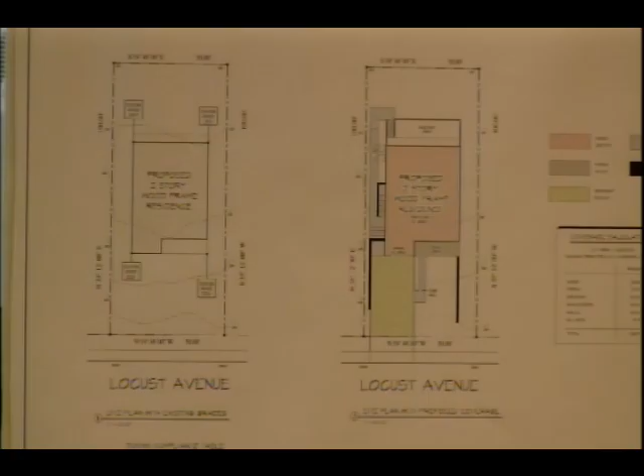The application was presented to the Architectural Review Board on January 16th, and it was approved with 2 recommendations. The first was to raise the band along the side to align with the upper porch. The second was to change the bracket at the garage doors to be a curved bracket. So we've done that on all the drawings.

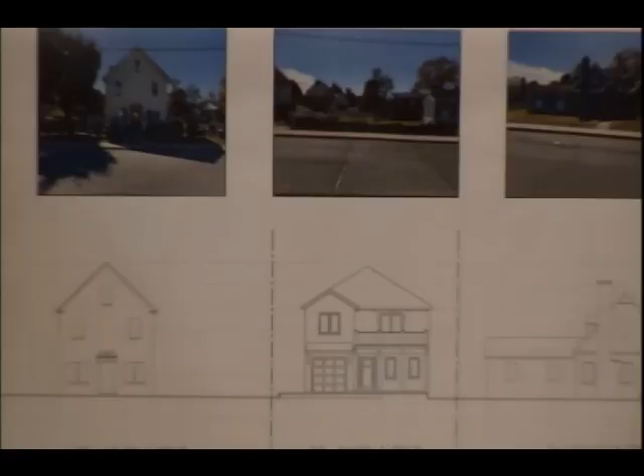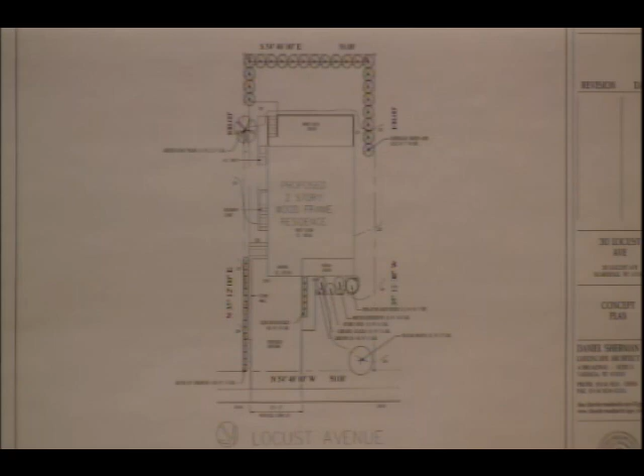We also submitted drainage plans that were done by Benny Salanitro, and we just received some comments from the town engineer this afternoon. Thank you for your time, and I'm happy to answer any questions.

Could you just elaborate on the comments about the stormwater? I literally just got them a couple minutes ago, I haven't even read them yet. Maybe Rick, if you want to go through them.

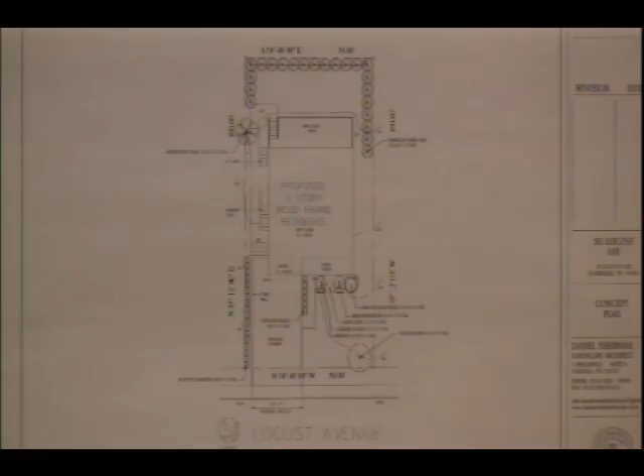Hold on, before you do that, tell me what exactly is there now. It's a vacant lot, completely vacant. So lots 30 and 32 are each 25 feet wide, and you're combining them into one.

They're actually two separate tax lots. Once the house is built, we're going to combine them to make one tax lot. It might happen automatically through an application to the assessor to reassign the number, and that will be a condition.

Does there have to be a new plat signed, or does it just happen automatically? No, it doesn't have to be a subdivision plat, they'll just do it on the tax map, so it automatically gets done.

I had seen that all the impervious surface you create is new impervious surface, since there's nothing there now. Nothing left over from anything. I think it was part of one of the lots closer to that other street, and it got subdivided at some point.

So I guess all the stormwater calculations prove they all make sense. They'll be reviewed, and we'll capture 100% of the new coverage, designed for whatever the town's requirement is, I think a 100-year storm for a new house.

Okay, great. Any comments? Once again, John, very beautiful, nice thing to see. Looks very beautiful. You want to put it up there so everyone can see, what good work you do, always looks good to see your work. Thank you, no, I don't have any comments, guys. No, looks really nice.

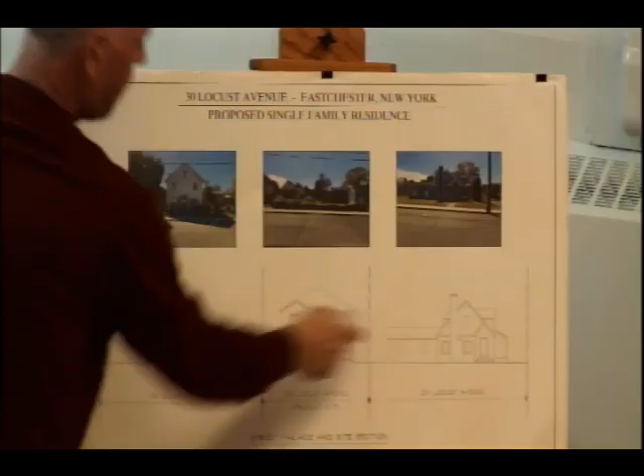Yeah, so this is his property here. So from what I understand, his drainage gets collected, goes into a pipe, the pipe runs across this vacant lot into the back corner. Supposedly there's a well there. We don't know if the well is working, or if it's just something that water dumps into, or how high the water is. We're gonna uncover that when the engineer's out there to do the deep test hole.

And we'll see if it fills, if it doesn't fill. If it doesn't fill, we're probably gonna use that as an overflow for our drainage. And we can work with the neighbor to try to take his water and also put it in there if that works. I don't know, the engineers are gonna have to look at that and decide.

Yeah, because the issue, the good news for your neighbor is you're going to be putting in Cultec and all types of water retention systems that will address the problem on your property. So you're not going to be getting overflow from his, but I understand the issue is that you have a pipe right now that stops.

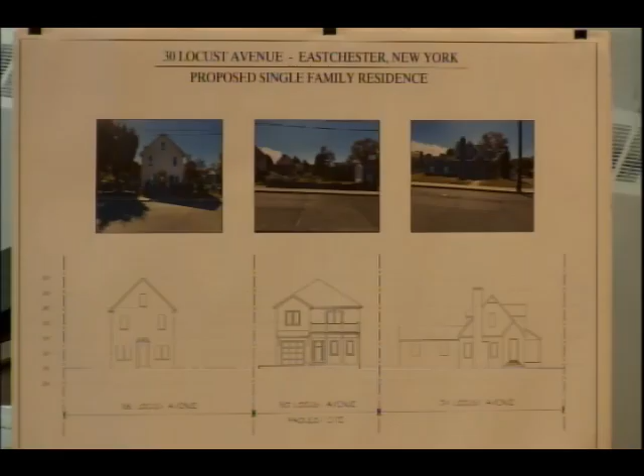It doesn't drain anywhere, because if he cuts me off, then I have no water flow. Then everything backs up, and it's already a high water table area to begin with.

And I think part of the question here as well, and I don't know what the answer is, but I believe this issue came up before. Sometimes by operation of law, you may have an easement for your water, and that's something you'd have to check, I don't know if that would be in the town records, or the safest thing would be to hire an attorney familiar with this type of thing.

Yeah, I'll let Mr. Tedisco speak. One of the questions that the board member raised was that your property drains onto another property.

No, my property drained on my original property before it was subdivided, which you guys approved. It was all one property. The drainage was installed when it was one property.

Oh, and you subdivided and sold off one. When I bought the house, I didn't realize that was an issue until we got all this rain and it flooded. We never would have been able to subdivide your property. We could only subdivide property that was owned by somebody else. We couldn't take your property and subdivide it.

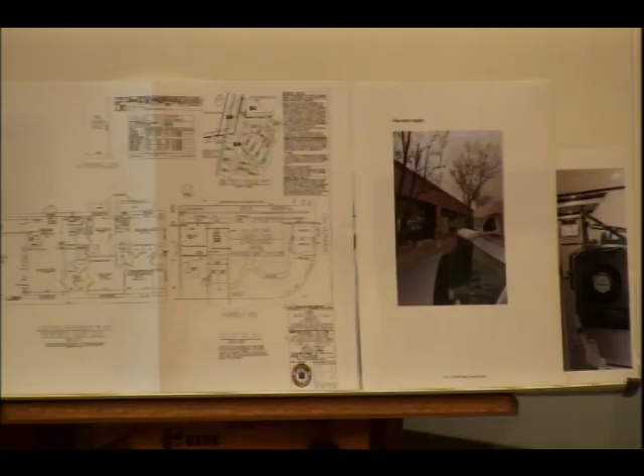Here's the plan, you could just hang it up — whoop, that's not it. Excuse me, I'll take it up. You know, I think this plan might be slightly revised to show parking compliant spaces, that is different than the larger plan, which is why I think he's putting up the smaller plan. Is that correct, John? No, let's just use this.

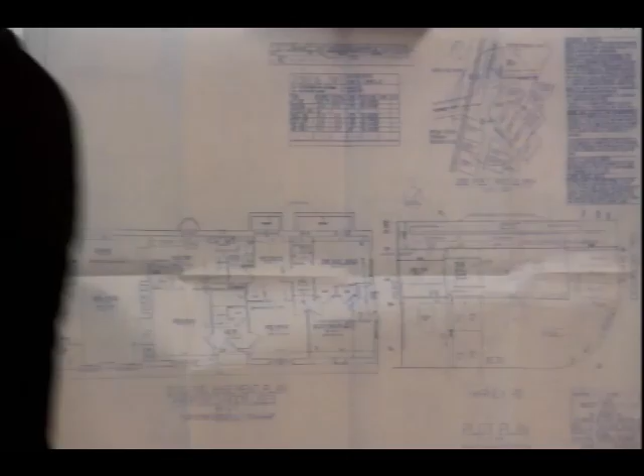This use of a daycare center is for pre-K. All the students will be young. The amount of employees depends on how many students we actually take in. We've proposed 2 employees, but it probably will be 3 or more. The ratio of employee to children changes with the age, so it's either 1 employee for 5 children or 1 employee for 9 children.

Part of his quest is to determine how many children he'll be permitted by New York State, because New York State provides the licensing for him. So he would hope to get 20, but is optimistic that he can get 15. With 15 children, he'll need at least 3 employees.

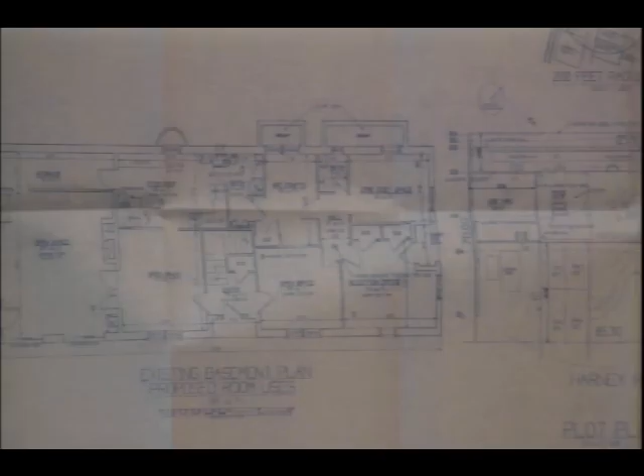We're required to have a space for every 500 square feet gross, so that's 4 spaces. We have only 4 available. We need 2 for the house because there's residents - there's 6 - and then we need 2 for deliveries and drop-off. Essentially, we can need as many as 8 spaces, so we're short. This is where we would require to be denied and sent to a variance board.

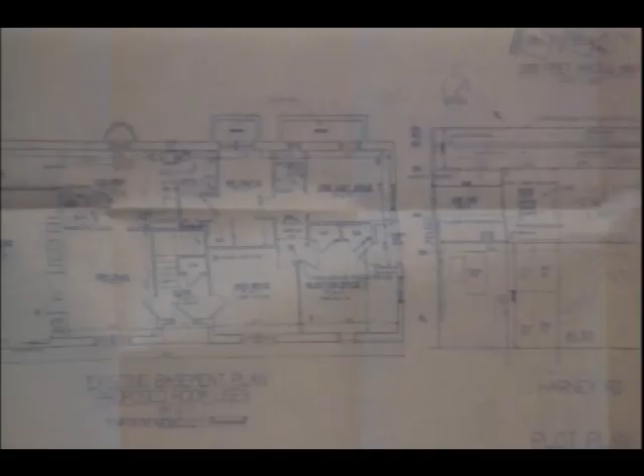To provide a little background, I've run across an old neighborhood study, not sure how old, it wasn't dated. It identified our area as Green Knolls, otherwise known as the Greenvale neighborhood, that comprises 106 acres, which is 4.9%, about 5% of all town properties. Of this Greenvale neighborhood, 69% of it is residential. It adds up to 7 units per acre, which is quite dense.

The parking and the traffic is certainly a concern we recognize. The area is a wonderful area for this use and many others because it has access to the Bronx River Parkway. So in terms of people dropping their children off and picking them up, they could drop them off and get right on the parkway to go to work. The drop-off and pickup times are probably the most contentious with the neighborhood, and we certainly realize that.

I would offer, and maybe Mr. Thomas would be better to speak on this, that parents aren't even allowed to come in when they drop them off. It's just up to the door, the kids are taken, and they get back in the car. It's a matter of seconds, a minute for each child that goes into the daycare.

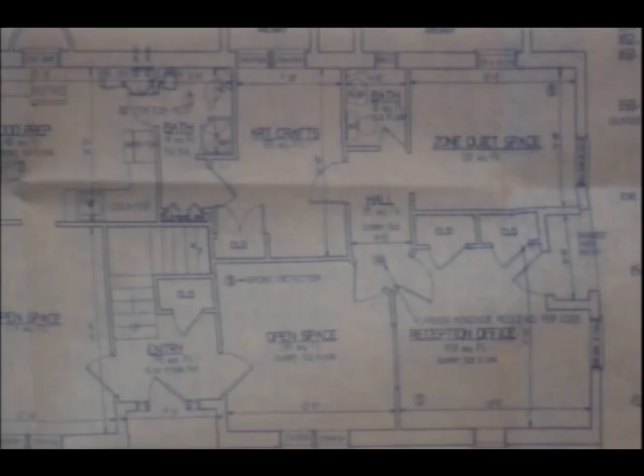These children don't go to other schools. They stay there all day, and then they're picked up in the afternoon. The property itself is a one-family raised ranch that was already altered for a doctor's office, and it has rooms, a little kitchenette, bathrooms, and everything you would need for its use. We have no proposal to change anything - we're not changing the way the exterior of the building looks. It has 2 tiers of outdoor areas for the children.

The state does require that a certain amount of outdoor area has to be provided. Can't lock the kids in all day - they have to have a chance to get some fresh air.

Mr. Thomas operates another daycare presently in New Rochelle for 20 years. His mother and another family member would aid in this operation. There's going to be 2 residents that'll be part of this and 2 other people that would commute, which is 1 car.

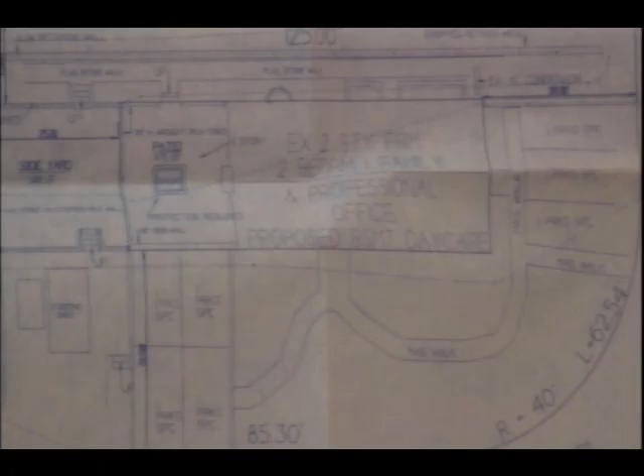In any event, we're going to need a variance for several cars. I don't know exactly right now, but I would ask for the most, and we'll entertain any limitations the variance board puts on us if they determine that we'd have to limit something to be able to get a variance. It doesn't seem possible to operate the business at the moment without that parking variance. So if you have any questions for me or Mr. Thomas, we'll be delighted to answer them.

Sure, there's a couple of things. The difference in this is you fixed the parking, so you got rid of the tandem spots and just showed the different parking - that's what this is, right? On that blueprint, the parking you drew out was not regulation, right? You had tandem parking, the parking spots weren't the correct size, so that's why you provided this, correct? That's why I do that, yeah. There's 4 spaces.

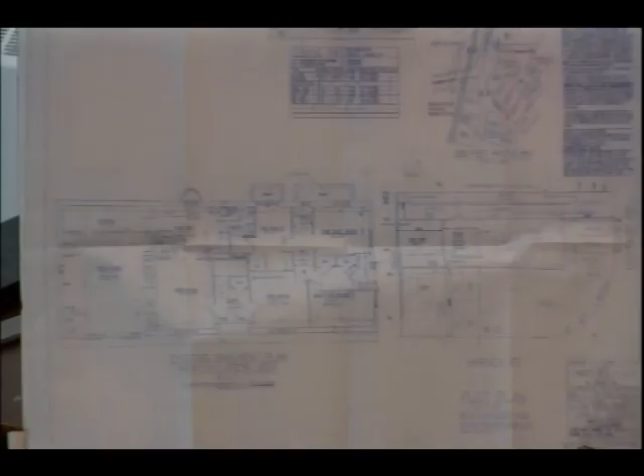Can you put this up there next to that so the viewing audience can understand what this is? You took the time to prepare it, so maybe we should show it to everyone. Maybe with a paper clip or a binder clip, just clip it to the side, just that one side. Yeah, that's perfect, so you could see the difference.

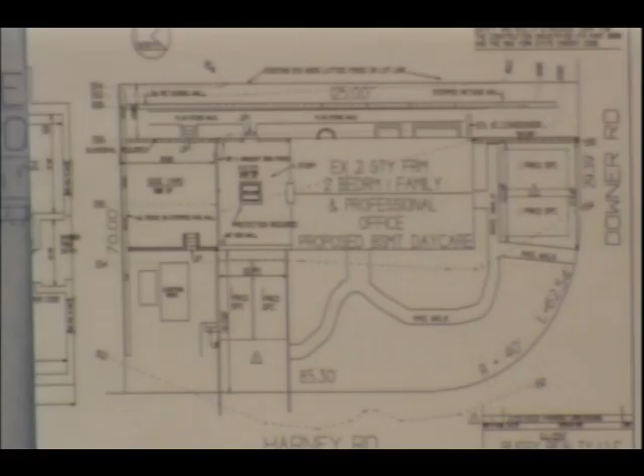Right, so you got rid of the tandem spots and you reduced the parking on Downer from 3 spots to 2 spots. Yes.

So before we go any further, you're here to get our motion to refer this to zoning for your variances. That's the first step, that's not a given. We have to agree. You're not here for us to say go talk to zoning. We're here to review the application and make sure we accept it, that we think it's reasonable, that we think it will actually work. So that's what we're here to talk about.

And right now I think we're all very apprehensive about that. Yeah, and it's not just about parking. We had an application on Brook Street, actually right at the bottom of Ray Place, for a similar type of operation. This was about 3 years ago, and notwithstanding the very best intentions of the applicant, the ability to move people in and out was, I think we had traffic studies done, incredibly problematic. I just throw that out there.

This is a different application, and every application is judged on its own merits. But I do know that particularly when you're dealing with very young children, it's sort of a double-edged sword. Someone's got to pick them up out of the car, you can't just let them run, particularly in a busy area. But that means stopping, and parking, and it's not like having a store with a certain number of spaces. This is something we care really greatly about, and there's always uncertainty that comes with little children.

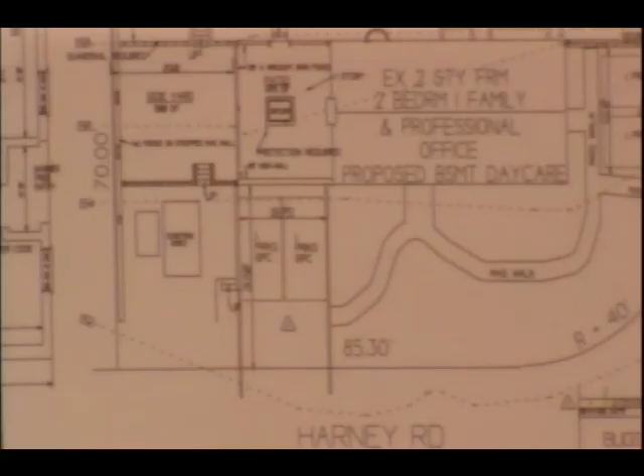So the major difference here is the 4 parking spots. Gary, can you zoom in on the revised one so we can see the 4 parking spots? So you can see the 4 parking spots there. In order to get the 2 on the upper right, you have to make a turn from Downer into it, take your child, walk them all the way over, get them there, then go back out onto Downer. Similarly with the other spot, and the other 2, same thing, you got to pull in and you have to back out. I mean, that's kind of objectionable.

Yeah, that's our concern, I think on Brook it was just easier. I don't know, and you got 15 children that have to be offloaded.

So that's 15 cars backing out. Or how long is the session? Hours of operation will probably be between 7 and 6.

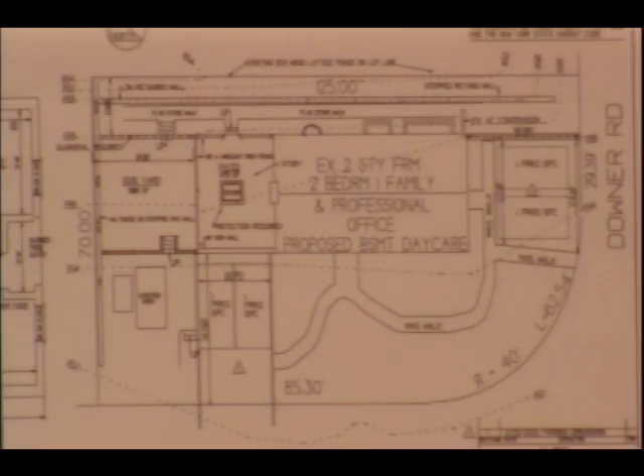Typically, and we do operate a daycare center today in New Rochelle of similar size, 188 Clove Road, right across the street from New Rochelle High School. Similar size, similar capacity, less parking than is available here today. We don't have issues with backing in and out of the driveway onto Clove Road, which, as you can imagine, is a rather busy street, being near the New Rochelle High School during school hours and letting out.

Here we do intend on prioritizing Downer, less traffic than Scarsdale, much less. But the drop-off hours are typically between 7 and 9. It's a pretty wide window based on parent schedules. Some are early, some are later.

Can I just add something? He wasn't done. Mr. Thomas, how many would be working there, you and your mother, sir, and other people? How many in total?

I wanted to add something that was said before about walking. There's 2 entrances, but there's an entrance right on Downer to get right into the building, so it's not a big walk.

So how many employees have to get there? And I'm presuming there's going to be one or more cars needed by employees. Two residents on site will be operating the daycare, so it's a one-car family—there's one car there. My mother and my sister will be commuting together, so that's two cars.

Okay. And certainly I think parking is one issue we have to discuss further. But the operations, as I said, the backing in and backing out—although it may work in New Rochelle—doesn't mean it works here. It's a separate situation.

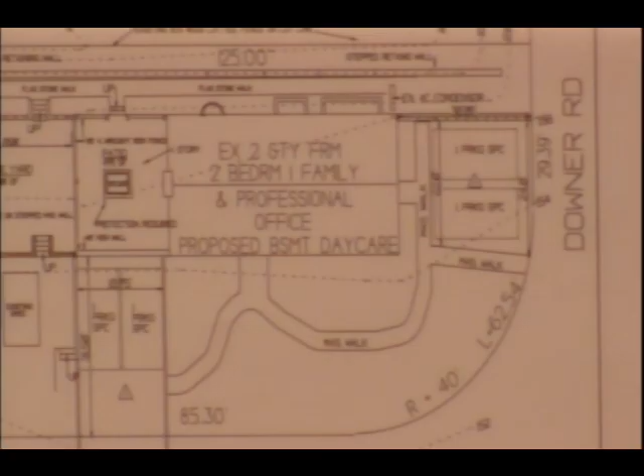But I think it's in your interest that we do so, because judging from the number of emails we got, you're probably going to hear a lot of people saying there's no way this is going to work, and your best bet might be to have a traffic consultant.

Well, who analyzes, and maybe on different issues, but the traffic issue—I kind of know what his consultant's going to come up with, and I kind of know what my consultant's going to come up with, and they're not going to be in agreement, right? I don't think we need to do the study. You're going to get a consultant that says it's perfectly okay, and our consultant's going to look and say it's not okay.

I'm more concerned with what the town's consultant says. Absolutely, I'm more concerned with what we say. I think in addition to a traffic consultant, our opinion on how this operates is important too, and we have to weigh in on it before we go to a consultant, as a board.

So that being said, all these folks are here to have comments, so take a seat.

Thank you. So I make a motion to open the public hearing on application 2513, Great Day Family Child Care, 32 Harney. Second. All in favor?

Aye. And maybe before we invite members of the public, we did receive several written comments. Any comments received before 4 p.m. yesterday are posted to the town's website. Just a high-level overview: the nature of those comments were related to traffic and parking in the area, a couple of questions about the outdoor play area, and a couple of questions related to the operational aspects of the business, which is really beyond our review and would fall more under the Department of Social Services review.

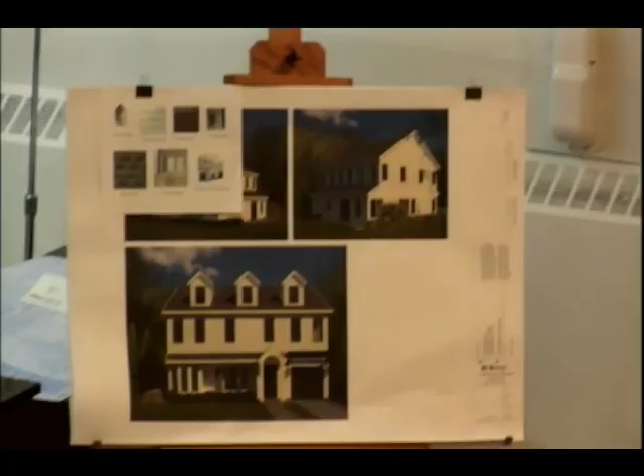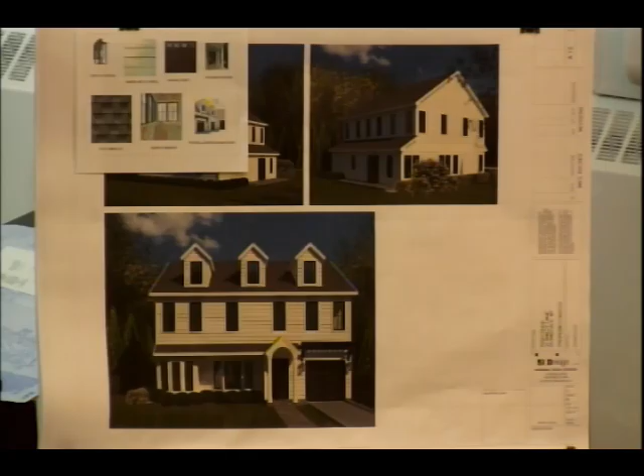We have been re-referred to the planning board because during the course of the construction or demolition, more demolition occurred than what was previously approved by the building department in terms of the percentage of walls and things like that. So that pretty much triggered the need to come back here. Although not a full knockdown of a house, it's pretty much 90% of a knockdown. So we were requested both by the town attorney and the town building department to come back to the planning board to get reapproval. Aesthetically, with the architectural review board and the planning board, nothing has changed. The design is exactly the same, the size is exactly the same. The zoning, if anything, has improved. The previous one had a 0.1 of a foot existing non-conforming condition that has been corrected.

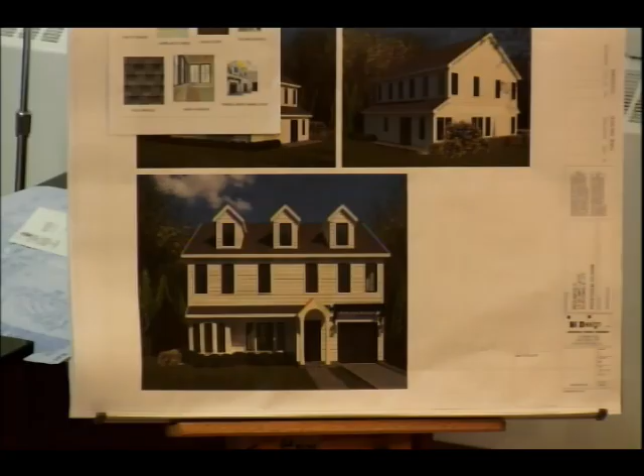So in essence, the original application consisted of taking off the partial second floor. Perimeter walls on the first floor were going to remain and be reworked, with interior alterations, and the end result would look like this. What physically really happened was pretty much everything came down to the first floor flooring, hence the need for the reapplication to the planning board.

The basement stayed exactly the same, the foundation stayed exactly the same, the footprint, the zoning, everything stayed the same. What we did do is classify this as a knockdown, so we redesigned the stormwater plan.

Although the impervious surfaces were all exactly the same, we acknowledge that previously we took credit for what was existing, and we only designed the stormwater plan for the additional impervious surface. We had our engineer test the soil, do the deep test, the percolation test, and redesign the stormwater plan, which has since been submitted quite a while ago to the building department. It netted an increase in the size and number of the Cultec units to conform with the Eastchester criteria, the 100-year storm.

The other thing that happened is this front portico was constructed 0.1 of a foot closer to the front property line than it should have been. So rather than pursue a zoning variance, the owner and builder are going to reconstruct it to meet the zoning criteria. In the end, every material, every light fixture, every garage door, every shape and size will be exactly the same as the original application, but we're here for a reapproval because of the procedures that took place. The logistics of the actual construction were different than what was laid out in the original application.

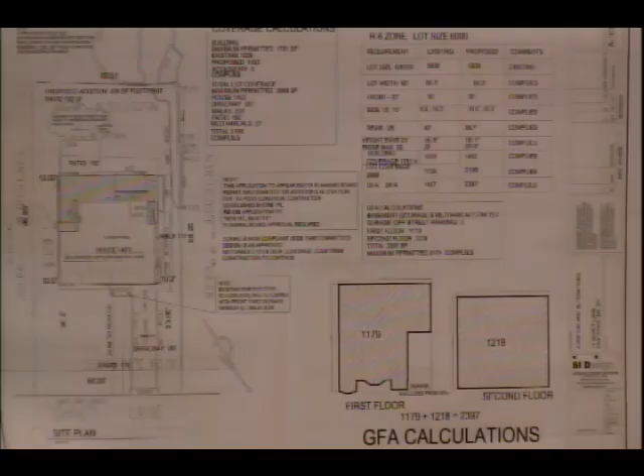So in essence, it is the same. The foundation remained; the new foundation was built exactly as per the plan. What changed is the wording on the application, the wording on the drawings, as well as the stormwater plan. Those are the three main things that changed. The setback used to be 9.9 because that was the existing condition, existing legal non-conforming. Since it was constructed new, it was built at 10 feet, so this changed for the better.

The stormwater plan in the rear - the drawings have been updated to show what was actually changed. Basically, the percentage of demolition has increased, and the stormwater plan has changed. Those are the main changes in the application. But the elevations from the street remain the same, correct, none of that has changed. I do have the photos if you want to put them up, if you'd like to see them. No, okay, thank you.

I do have something of a concern, because I went past and took photos of the site, and one thing I wasn't pleased with, looking back at the approved rendering, is that the windows on the second floor are evenly spaced underneath the dormers. As built, it's not that way—two of the smaller windows are closer together. They're noticeably asymmetrical.

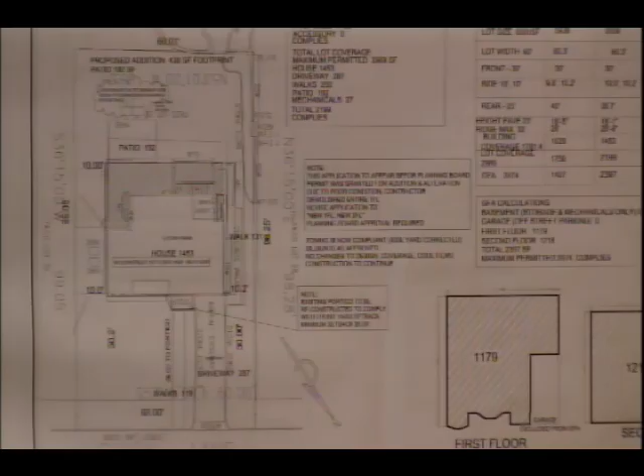Well, they were positioned—if you put it up, there were two on one side. Can you put up the illustration you used before? See, they were basically... it's not perfectly symmetrical, but there are groupings of two on either end, and two in the middle, and all the windows are the same size. It's not really a rhythm—everything's a little bit different.

They were basically dictated by the interior layout, and the architectural review board agreed that it was okay. We weren't going for perfect symmetry on this—it's not a colonial. It's imperfect.

I think the main difference is these two—they're probably a foot closer than what's represented here. And you have a smaller window above the portico. Yeah, it is noticeably smaller.

So, Mr. Nemisak, what are you saying? You took a picture of what's there, and it's not what we're looking at. I can put the picture up here—I have one too. Better to look at pictures than just talk about it.

Look, it's not perfect. I don't know that every design comes back perfect. I'm just saying it's something a little different, because you said it's basically been built as approved, and I could tell immediately—my wife recently finished her 10-year tenure on the Architectural Review Board, and she immediately saw that's not something she would have approved. So it's not a showstopper, not the end of the world, but either we try for reapproval or correct it physically to match what was previously approved.

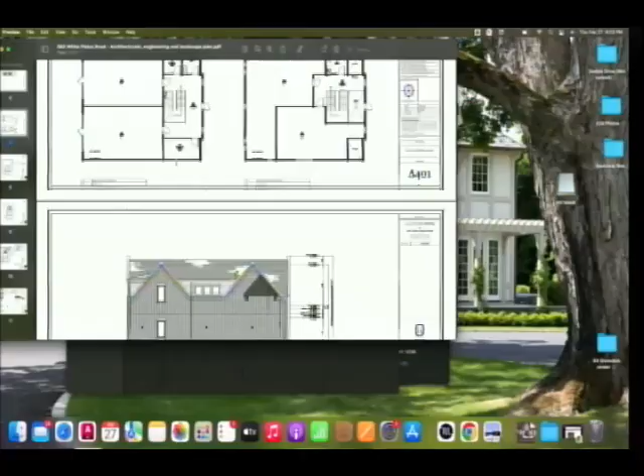Okay, so in terms of the signage, I have the drawings on the computer. Did you add them and then I missed them? Yes. Okay, no problem, it's been a while. It's not going? Let me try again. Oh, here it is.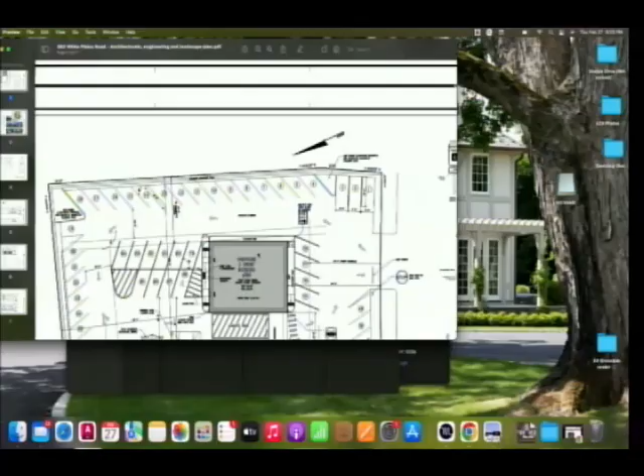So the signage, we have the directional arrows, which are in the parking lot. And then on the entrance, on the south entrance on White Plains Road, we have two entry-only signs, which will be installed perpendicular to the flow of traffic for ease of view. And then on the south curb cut, we have a do not enter sign, same configuration, perpendicular to the road. And then a stop sign on Cypress. Internally, there's also directional signage on the building, which will direct the flow of traffic as well.

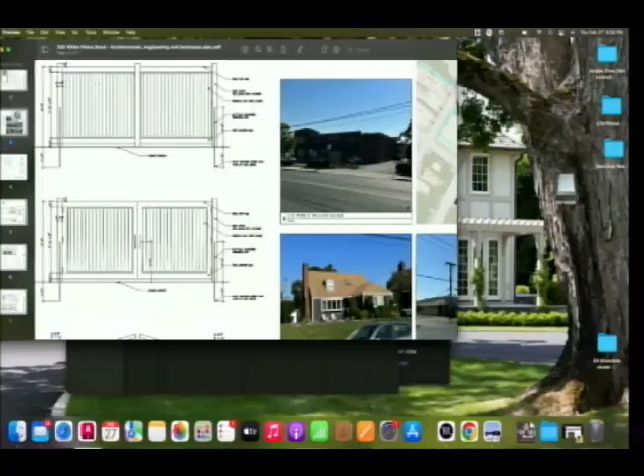In terms of drainage, I believe at our last hearing all of the comments were addressed. Yeah, there's an existing system, but I think you need to be in construction to unveil it and look at it and then figure out what needs to be done. Yes, that is correct. And at that time, I think Joe, who was here previously, said he would come out and do the inspection with our civil engineer. Right, and then we'll make any modifications.

Right, so for the board, the way we would propose to address stormwater here is as a condition of the approval: at the time, during construction, the applicant will consult with the town engineer to figure out what needs to be done, and no certificate of occupancy can be issued until the drainage work is done to the town engineer's satisfaction. Okay, sure. Follow that language, I can remember that.

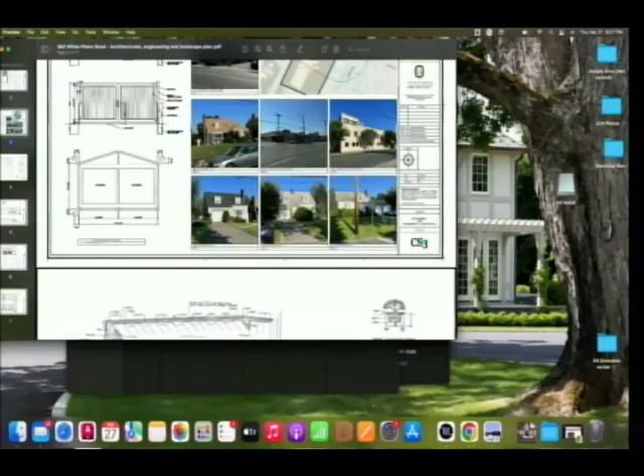Do you still have questions? Nope, those are my only two points. I'm just going through the conditions. There's some comment here also about the remaining comments raised by the town engineer in the memorandum dated the 27th. Nope, that one we can dispense with because the only remaining issue is number 3 on drainage. The others have been addressed on the plans, number 1 I just missed it, so we can take that one out as well.

That's good, so I don't have any questions. Is this an open public hearing? Yes. Any comments from the public regarding this application?

360 White Plains Road? No. So I make a motion to close the public hearing on application 2327, 360 White Plains Road. Second. All in favor? Aye.

Okay, so the conditions are the one way, you got that. During construction, the applicant shall consult with the town engineer to review the existing stormwater management system and modifications that are required. No CO will be issued until all modifications to the stormwater management system required by the town engineer are completed. And I'll read the last one just for fun.

This approval authorizes the applicant to undertake only activities specifically depicted on the plans submitted for review at this meeting, in accordance with the resolution approval. Any change or modifications to such plans require amended site plan approval. But you probably already knew that.

Good, so then, that being said, I make a motion to approve this application, 2327, 360 White Plains Road, subject to those conditions. Second. All in favor? Aye. Great.

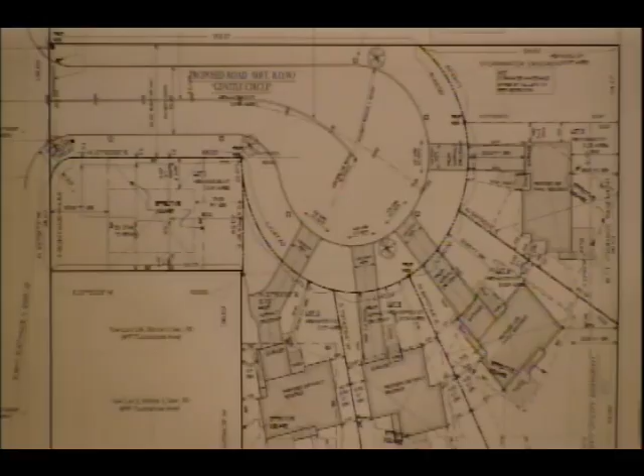So one variance is the town requires 150 feet from the center line of the new road to the closest adjacent. We're going to need a 6.05-foot variance, as where White Plains Road and our proposed road is, that is all we have. If we try to shift it, it'll create more issues.

Another variance is we're supposed to have a 12.5-foot radius, a 12-foot radius here. Again, we don't own this property, so we're going to need that variance. Right now, lot 1, we're not proposing to do anything - we have a future vision for this whole lot, so this is going to require variances to keep the house until we finally decide what we plan to do with this lot. So those are the variances I believe we need.

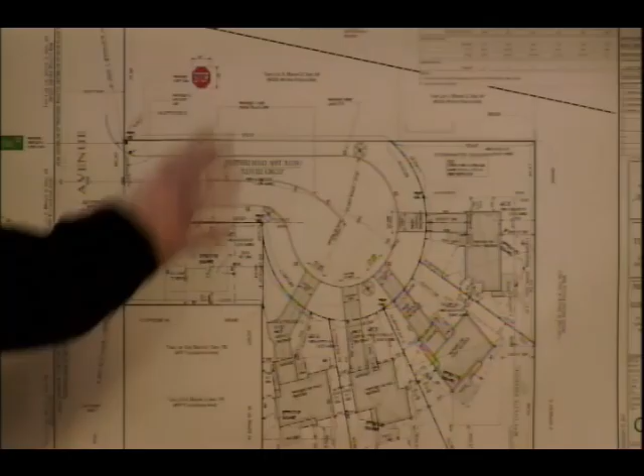But the actual homes that are contemplated to be built, do they all require no variances? No - all those lots, even this lot, everything: lot width, lot effective square, lot area, all that, every lot meets all the codes. The only lot that doesn't meet any codes is this area which we changed.

Instead of it having a separate lot, we made it as an easement in order to get rid of that whole other weird lot that we originally thought to have the stormwater on. Very good - a discussion of easements, that's how we began the day.

Discussion of easements. We have received comments from your consulting engineers. I believe some of it is a little clarification, but I think all in all it's pretty much there. We would like to at least get in front of the zoning board before we go any further with additional drawings and stuff. So one thing in all the reading I did before this meeting, it came up - it was the sidewalk.

Was that discussed, to put a sidewalk out to 22? There were a bunch of discussions, but I don't believe we got any resolution on that. Is that an option? How would you go about doing that?

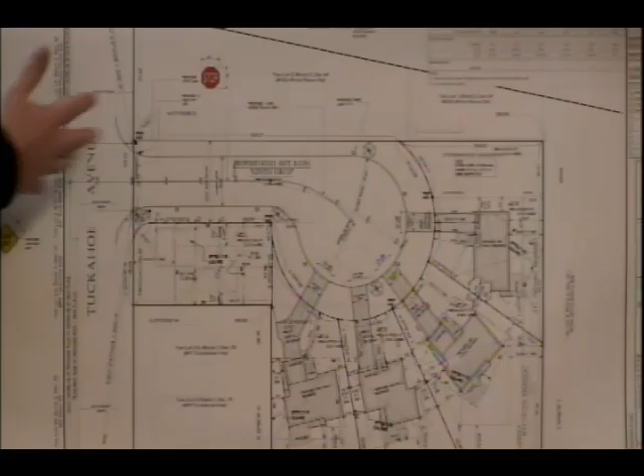Well, since there's a curb cut here, and a curb cut for the pizzeria here, I don't think it'll be practical to bring something out to this corner. It's just going to be a small stretch. Is there a sidewalk around 22? There's a sidewalk on 22, but nothing here.

That's when you'd have to put it on their property if you want to build a sidewalk. Well, we'd have to come across their property here and put two handicap ramps. And really, anybody coming down the road, there are no other sidewalks on Tuckahoe Avenue, so they're going to come here. I doubt they're going to come up onto the sidewalk when you're already 90% of the way down.

No, I agree, I guess it's not a good idea to put a sidewalk, because for you to do it, you'd have to put it in their parking lot. Unless it would fit in the right of way, because you own the right of way for that, because the town would own the right of way, so we could come to an agreement. Right, we could do it in the right of way, but it's just this short stretch.

I think it'll also kind of look weird, just this little piece being sidewalk and the rest of Tuckahoe being a nice small community. Yep, you're right. Okay, what are we doing here?

One other thing, we have had some communication with the fire department, and the applicant submitted the fire truck turning radius diagrams. The fire department is a little bit concerned that it's tight to make the turn into the subdivision road, particularly if a car is parked on Tuckahoe Avenue, and with parking on the subdivision road, that might be something we should continue to explore as we move through the application.

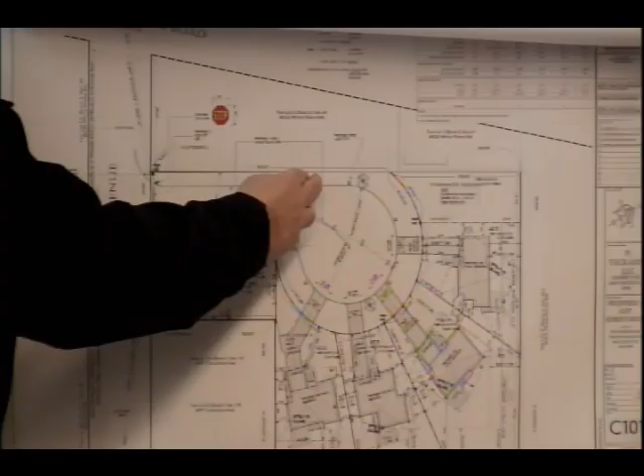So where exactly is the fire department concerned about if a car is parked? When they try to sweep in on this side, with the largest vehicle that they have. The other two apparatuses make the turn well enough, everything worked. The largest one, as it came in, there was a little bit of congestion here, and then as you came around, this light pole and this tree are going to be relocated, so when the truck comes around, it doesn't hit into it.

And there was a concern particularly with cars parked on Tuckahoe Avenue with the truck turning in, whether it would be able to make that turn. I remember a few times during public hearings as well, there were concerns from neighbors about parking there, and I think everybody was in agreement.

Can you stop somebody from just parking there? No, that would be something the police department would have to police, but you'd also have to look at creating signs saying no parking. Yeah, we can add signs to say no parking.

Well, on Tuckahoe, that would take an action of the town board. To prohibit parking on Tuckahoe Avenue would take an action of the town board. Yeah, it's not something we usually address. But I can add a couple of signs on the drawing to show no parking.

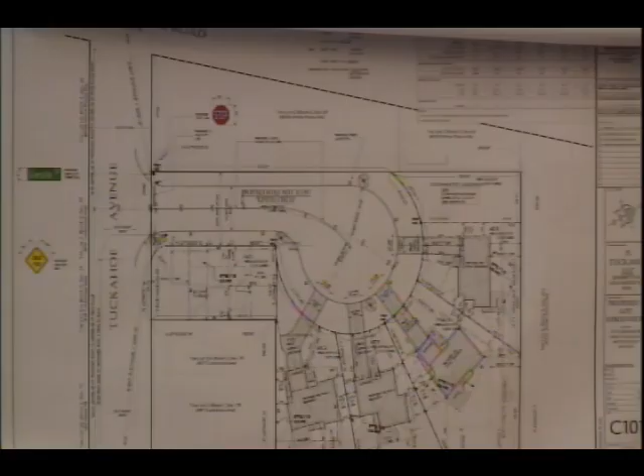I think it's probably worth some further review and discussion with the fire department. That's fine. I don't have any other questions, you guys? Nope.

This is still an open public hearing? Yeah, the issue with the fire department can be analyzed concurrently with the zoning board. Sure, if you feel comfortable making a SEQRA determination, the turning radius for the fire trucks goes to our subdivision standards and access, so that's something we can continue to work on. That's an issue that might come up for both variances before the zoning board, so it might be something we work out even before that board sees this application.

So this is an open public hearing, so if there are any members of the public that would like to comment, now's the time.

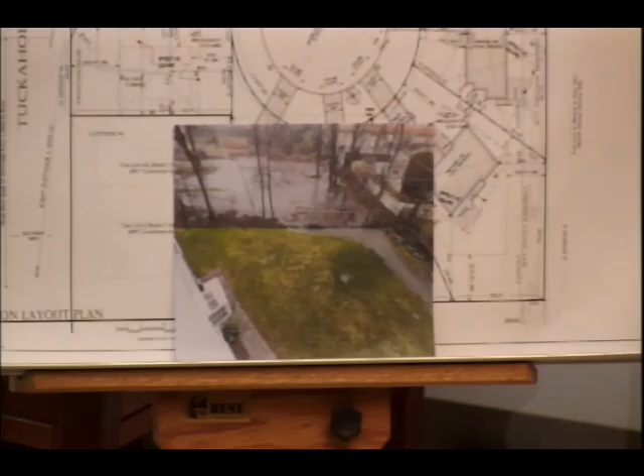This is a water issue. I don't know if you can get that. My name is Jean Gessoff, and I live at 5 Duluth Place. The picture that I just put up there is the water that collects on this part of the property that they're going to develop. First of all, I'd just like to say it makes me very sad when these nature preserves are developed and all of the wildness that there is in Eastchester is gone. That makes me very sad. But having said that, we have the neighbors and mine. I don't live on Tuckahoe, I live on Duluth Place, which is a cul-de-sac, and my property backs up to where it's going to be developed.

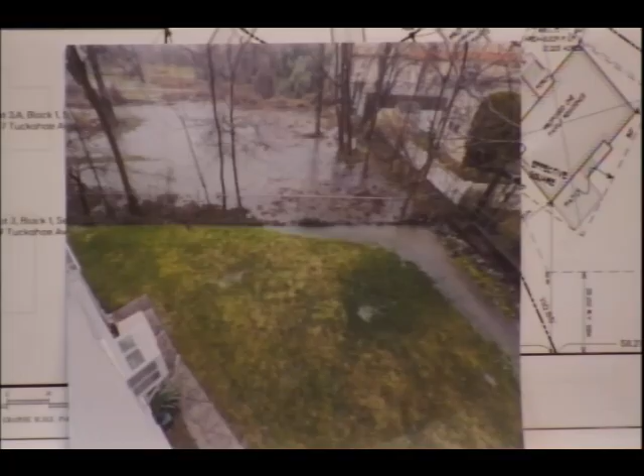We've always been concerned about the water that collects there. I've been in touch with the town, and they've come out and looked for drains. I was here about two years ago, and we talked about whether there were drains there, and it turns out there are drains, and they were not clogged like I thought, but apparently they're not big enough. So from what I understood, from what I looked at, you're going to put in bigger drains, and they're going to come out onto Howard. How are you going to get to Howard? Because my property and my neighbor's property, you have to come through there in order to reach Howard, which is a dead end. And nobody's contacted me or my neighbors about how you're going to bring these drain pipes through our property. Or will they be on our property? I don't know, and that's my question.

Could you get up and get to the mic? You're saying some important things. Can you speak into the microphone? I think all the sound goes through the microphone, and the court reporter can't hear it otherwise. What you're saying should be on the record directly, so maybe you could repeat it. You can hand the mic back and forth to each other if you need to, but we want to make sure to get it all.

What we can do is exchange numbers, and I can come out and we can walk through everything and discuss everything. I think whenever it's time for that, right? If you could write down your information, here's my card, I will call you tomorrow morning.

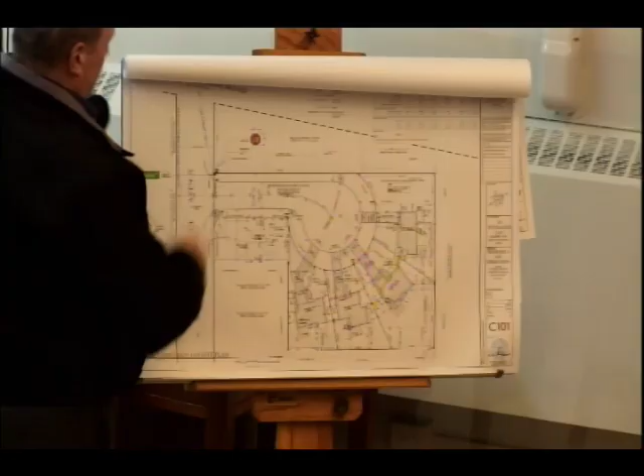So let's try and answer the question. So just for my knowledge, any water coming off the site gets held on site in the detention tank, and then it gets released, correct? Correct. So the way the system works, let's go back to the plan, because this has more information.

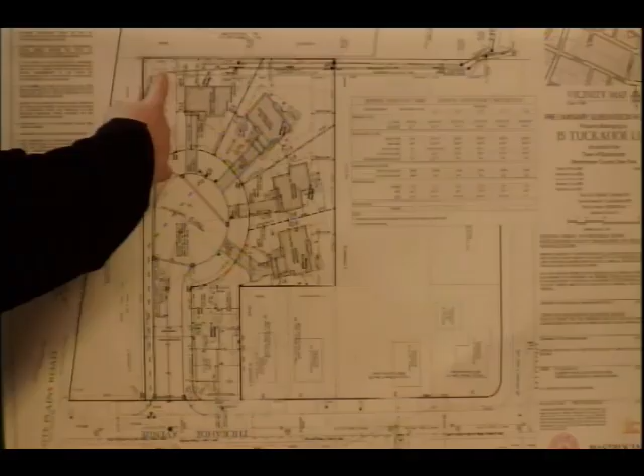The stormwater for the road is all collected in this series of catch basins and piped into this underground chamber system that's sized for the 100-year storm. That's what we're going back and forth with detailing on. Then it's going to overflow and come down and tie into Howard.

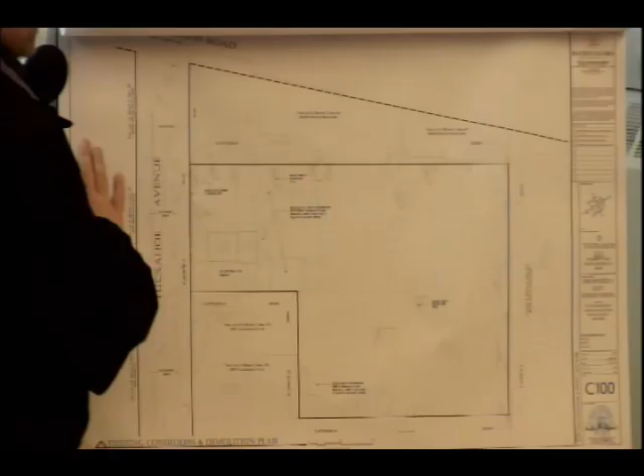Now, just a little bit of history on this whole area. When the shopping center was constructed, they raised the grade of the shopping center about 5 feet, roughly. And what happened is all the water stopped, because everything runs roughly northeast. Since that retaining wall is there, it blocked everything, and this started flooding. This was back, I have to go back through my records, but roughly the 60s.

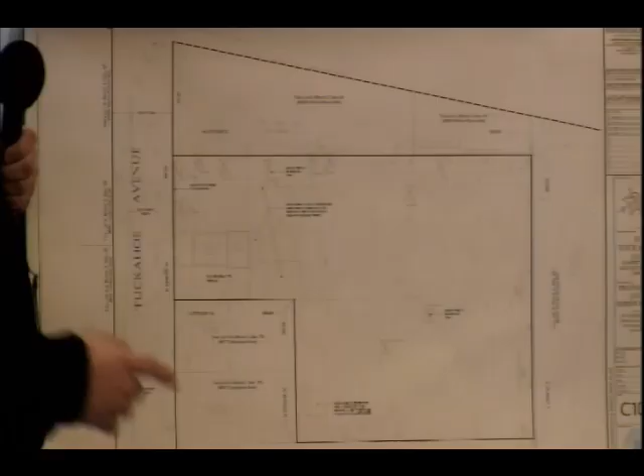At that time, a lot of people complained that now there's all standing water. The town actually came in and ran a series of drains out to Howard. Then in Howard, at the dead end, off the grass, there's a manhole. It's made out of brick, an old manhole. From there, it runs along Howard and down Joyce and ties into whatever town system, wherever it goes.

That system was just put in, and there's very little records on this system. So we surveyed it, and the pipes are very undersized. I mean, they're very shallow. There's not enough room to collect the water to get it out. That's why there's all that standing water.

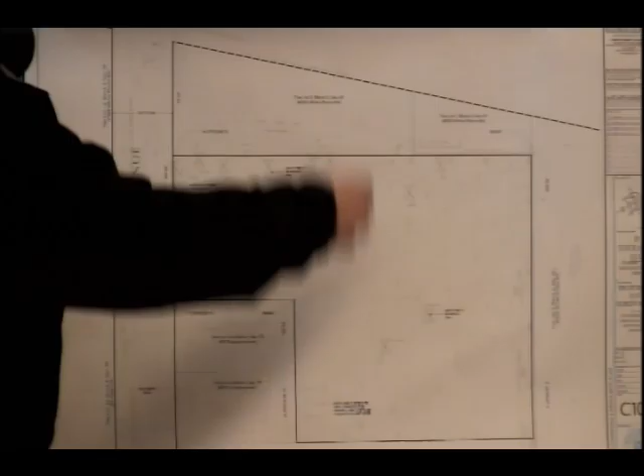Which pipes are you talking about, the pipes along the retaining wall? The old pipes along the retaining wall that are there now. Okay. What we are doing with this whole system—and again, these are all the numbers we're going back and forth with—is making sure these pipes are properly sized to collect not only the water from the road, but any overflow.

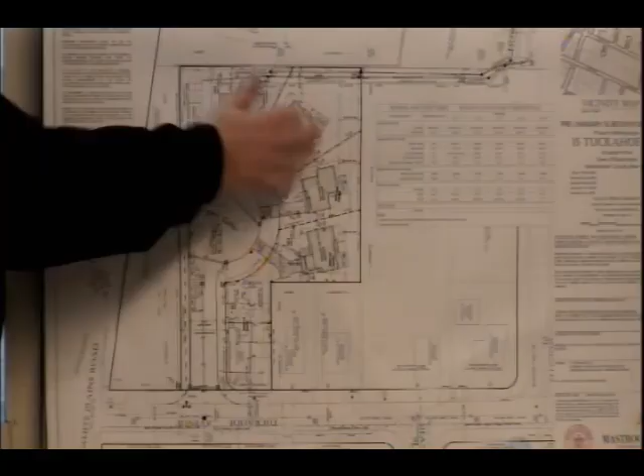Each house is going to have a 100-year storm system collection, but preventatively we also put an overflow system into this new extension in order to make sure we don't disturb any neighbors. That system can also help collect anybody's sump pump that might not be working right, giving it a place to actually discharge, things of that nature. If somebody needs to put in some sort of French drain to dry up their lawn a little because it's very wet, it can handle that too.

Wasn't it, I think the neighbor just commented, and I think this is correct, that originally the excess water was going to flow out towards Tuckahoe, right? Right, yeah, but the only place—and if you remember, we had all the neighbors here because the system on Tuckahoe is very ancient, and that's even undersized. And the closest connection point is 1,000 feet away.

Because if not it's not feasible—it's so dead flat that you can't even get it going. So putting it on Howard, and then it connects to Joyce, that's shorter, there are just a couple of houses before the intersection of Howard and Joyce.

Correct, Howard and Joyce actually intersect twice. This side, right? Yeah, and then it goes down Joyce? It goes downhill, yeah, there's a large differential gradient going down, so the water has a better chance of relieving and not backing up and flooding anybody.

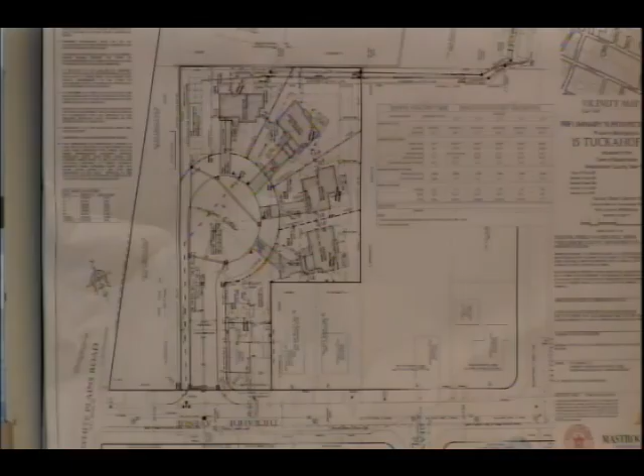Can you point out where the gentleman's house is? 86 Tuckahoe, 86 Howard. The house right here.

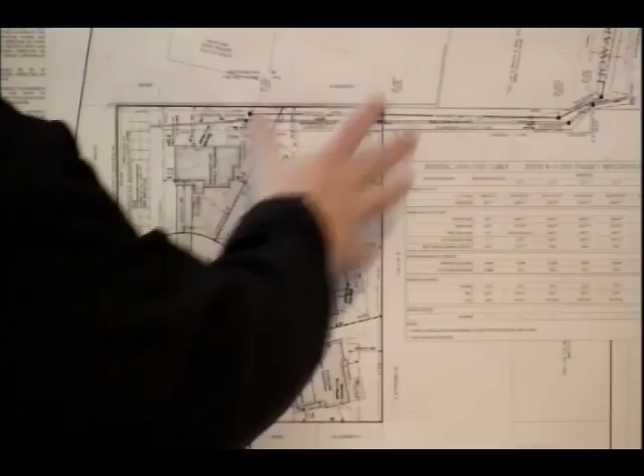So I'm not a water engineer and I don't want to try and be one, but it seems that any water that's currently on that site has to find a way off of it. Correct, and perhaps it goes to Howard - I have no idea where it goes. Which direction is that site sloped currently? Well, currently everything's sloped towards the shopping center, and that's why this is like the dead area here where it's got no movement, because the grade comes up very little, but the grade does come up going towards Howard. So now with this development, we're actually taking any water that hits that block of land and sending it down, away from here. Correct. I mean, I don't know, is it reasonable to think that's a better condition? Do you want to opine on that a little bit?

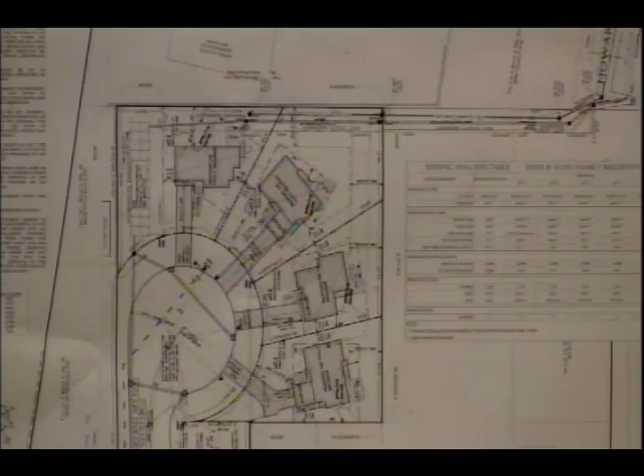Yes, definitely a better condition, because as it is now, it's just sitting, slowly dissipating. Whatever's not sitting on top of the soil is getting percolated into the ground, and it'll eventually make its way as the grades are on the surface - it'll start making its way apparently towards 86 Howard. Now it'll be controlled and piped and dissipated much faster than it was under existing conditions, and in a much more controlled manner. I don't know if that's an answer, but it seems...

Yeah, I mean, I can't predict the future, especially when it comes to water, but - No, but from what you said...

But they're very, very flat, so the water is going very, very slowly out - you don't even see it. That's why it takes 2 or 3 days for everything. So the bigger pipes that are going to be put in along that retaining wall are also going to have more of a slope downwards? Is that what will ensure that the water keeps flowing? And right now you say it's pretty flat, so the water doesn't rush out.

Well, the mathematics goes between the pipe diameter, the pitch, the slope of the pipe, and also the type of pipe. So that's what we're going back and forth with, to make sure all those pieces of the puzzle work correctly so we don't have this issue any longer.